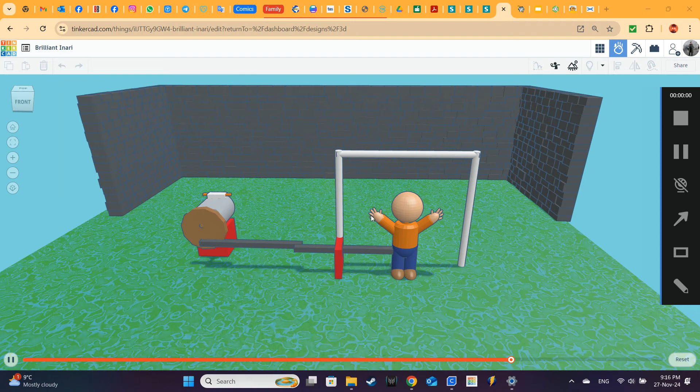In this case, we will start combining the three connectors that we learned during the previous lesson: the axle connector, the pivot connector, and the slider connector.

So for this first video, we will create a goalkeeper machine. Basically it works with a crank mechanism, and when I try to throw a ball, my robot will try to stop it before it enters the football area.

Before we start, let's analyze this machine, this mechanism. We have an electrical motor. If you attend my lessons, you're probably familiar with this kind of DC motor that you may find if you open a mechanical toy using a screwdriver. We have here this axle connector that is a motor — it has torque and speed.

We have a second axle connector that connects the crank to the connecting rod. This is not a motor, it's just an articulation. The next one is also an axle connector that also works as an articulation — it's not a motor. And to give stability to our project, we have a slider connector here.

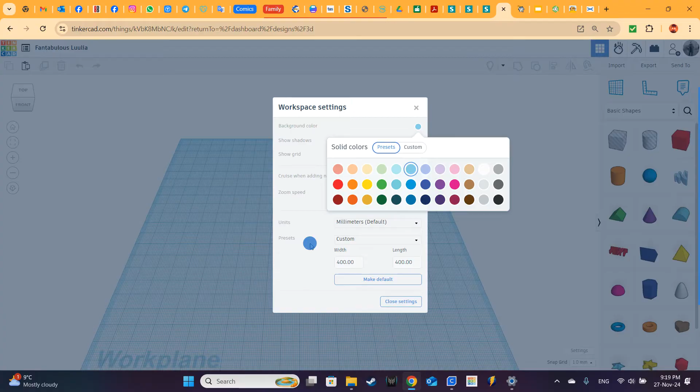Here in background color, I will change the color of the background. I'll use some blue sky. Close settings. You can choose the color of your preference here for the background.

The ruler is always good to bring — a ruler always makes your work easier.

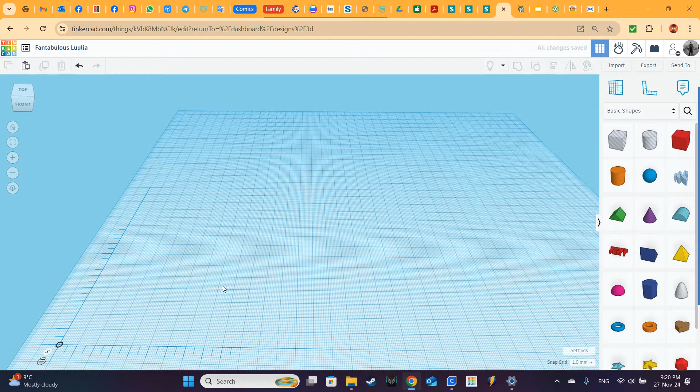Now, from basic shapes, I am bringing a box. Just a box here. Nothing special about this box.

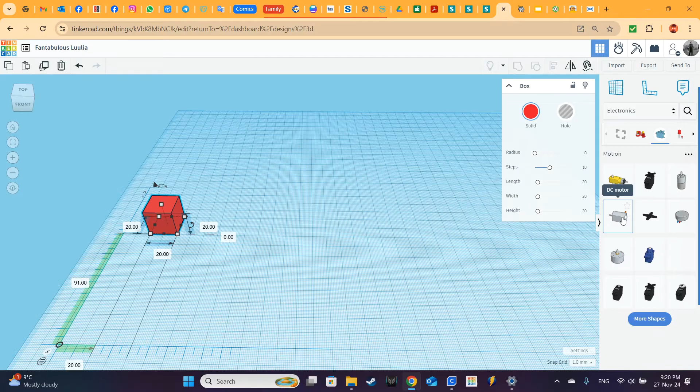Now, from the library, shapes library, I'm going to electronics. The idea is for you to start getting familiar with the real world components that engineers and designers use for their projects. We go to electronics motion, and here we choose the DC motor. This is the kind of motor you find in your mechanical toys.

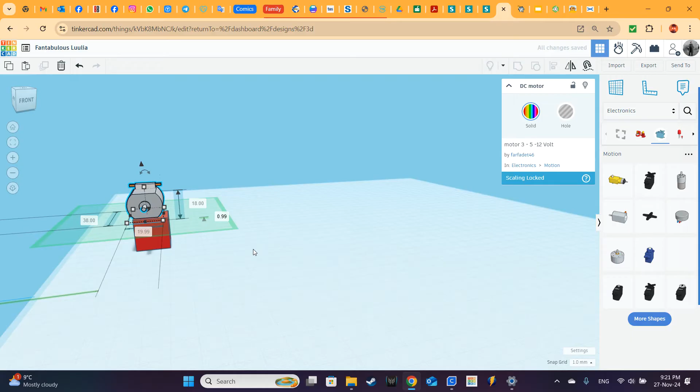I will place it here over the box. I'll rotate it 90 degrees. Good, 90 degrees also here. So here and here. Okay, so we have our motor over the box.

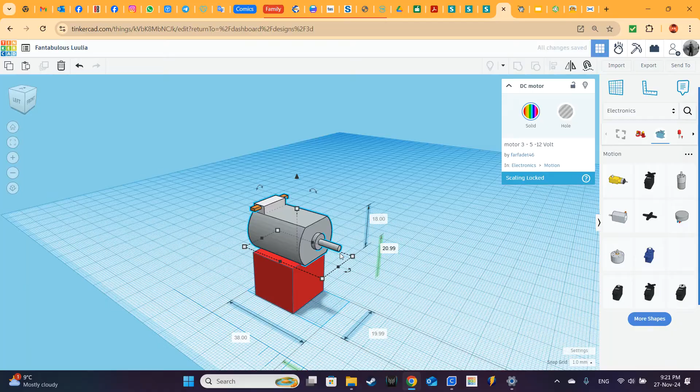Remember that in the real motor, this part is the spinning part, this axle. And these two pins are where you connect the electricity so it can transform electrical energy into mechanical energy.

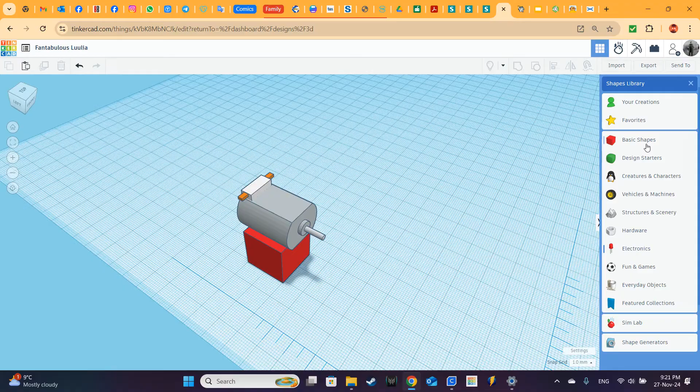Now I am bringing a cylinder from basic shapes. I bring a cylinder and I will place it here.

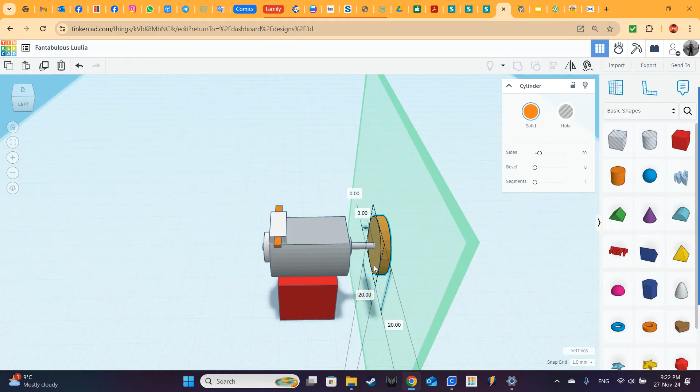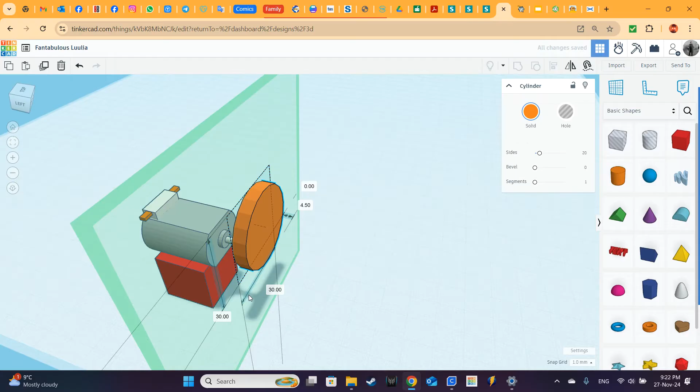As you can see, I place the cylinder perpendicular to the axle and parallel to the front side of the motor. I will change the size of this wheel — I think it should be shorter, yes. I will reduce the size a bit.

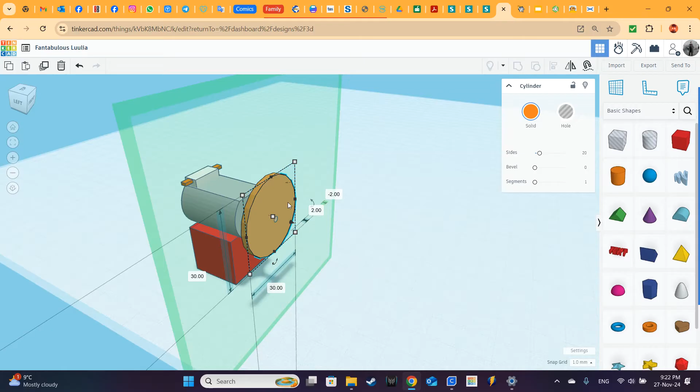Now let's try to place the center of the cylinder aligned to the center of the axle. So I go to front view, and if you remember from our previous lesson, we can change from perspective to orthographic flat view.

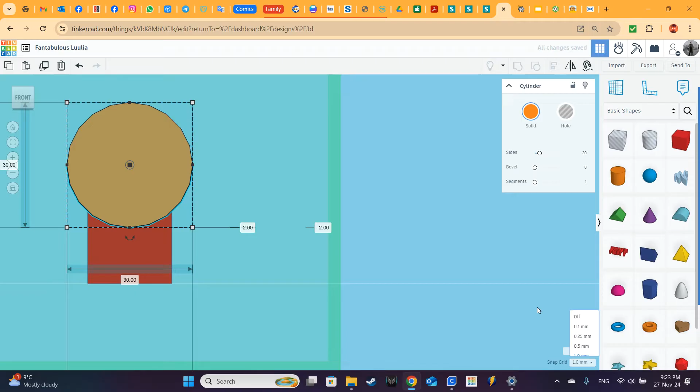Let's move it. Good. Even let's align here a bit more. Perfect. Yes, that will do. Okay, 1 millimeter. Very good.

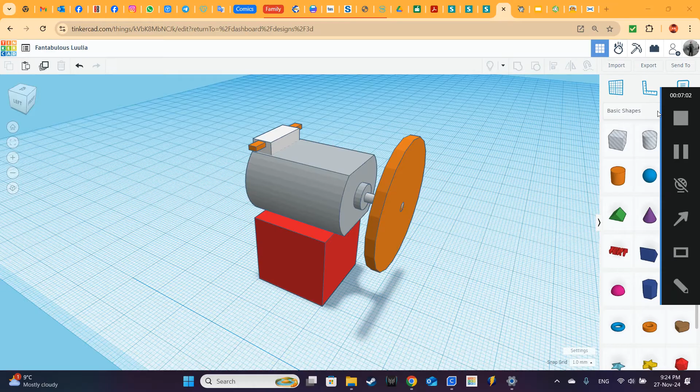Now that we have this first part, the motor, we are going to the SimLab — or you can also modify something here first. Good, much better.

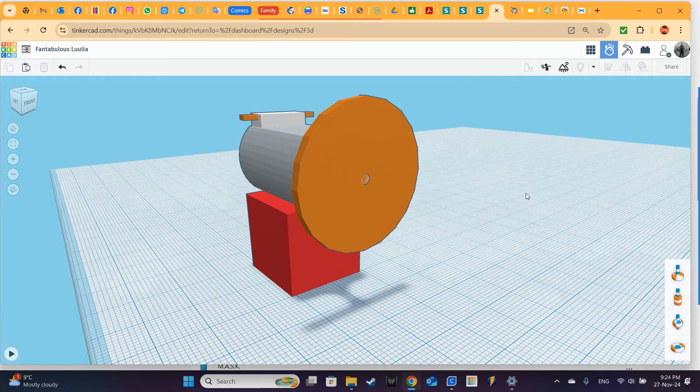So you can find here in the SimLab group of shapes the connectors, or you can go directly to the SimLab to start doing tests. So I go to the SimLab. Our first connector is a motor, so it will be an axle connector.

I bring the axle connector here and I place it here in the middle. Okay, good, that will do.

First, this box is static. It must be static. Here it appears as dynamic, so I am making it static. Static. The box is static.

Now the motor needs to stay in place. It's dynamic, so I will change it to static. Good.

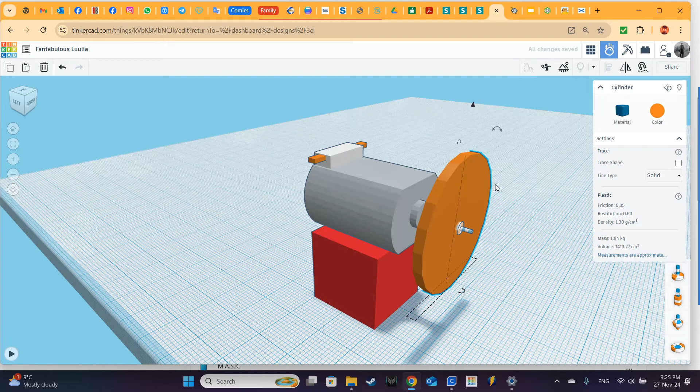This disc, I need to be dynamic. Is it dynamic? Great. I will change the color just in case, so it's clear what I will do next.

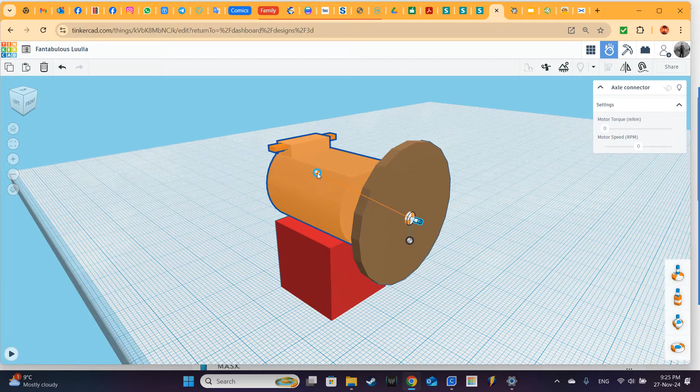I click the connector. Now let's choose the base part. Remember, the base part is the one that will be marked with orange color. In this case, the base part will be the motor, the base component.

Now I will choose the rotational part, this disc. So I grab the gray disc and I select the blue part, the blue component. This is a motor, so motor torque I will increase a bit, 65 could be, and motor speed.

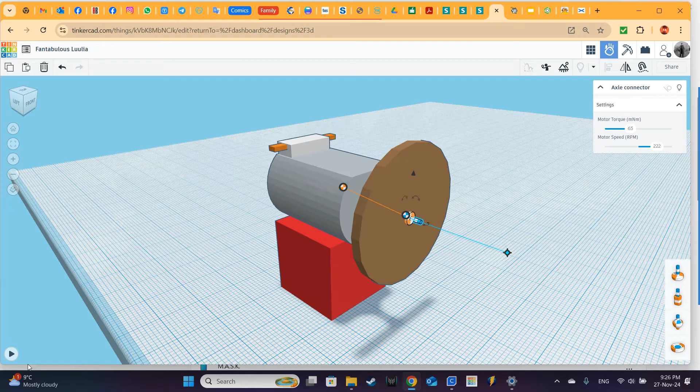Let's add some motor speed. Which one? The one that works best for you. You can do experiments until you find the perfect combination of torque and speed. Let's see if it works. Good, it's spinning.

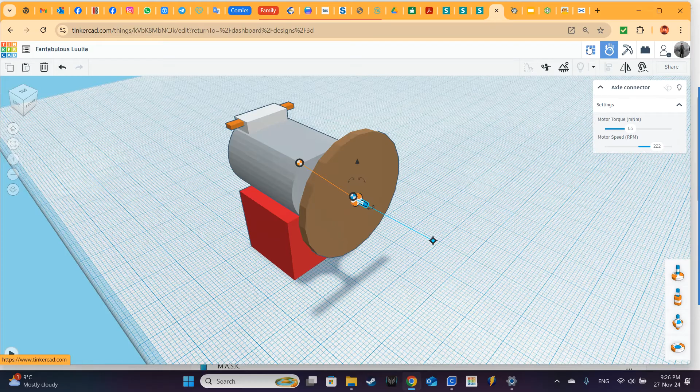So, first part ready: blue, orange. I return to the design environment.

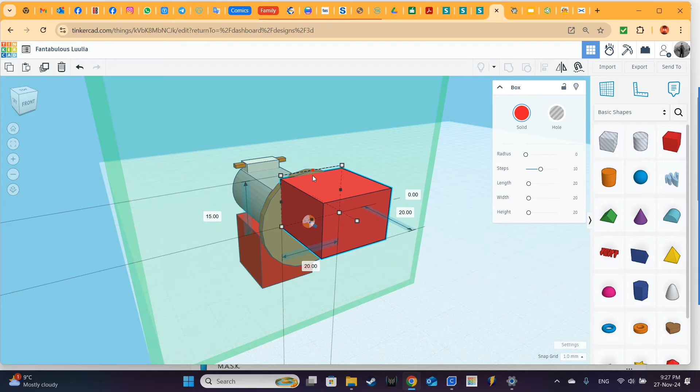From basic shapes, I will bring a box and place it here over the cylinder. Now I will build the connecting rod of this crank mechanism. I modify the dimensions of the box.

The idea is to create here a long rod. This will work, yes.

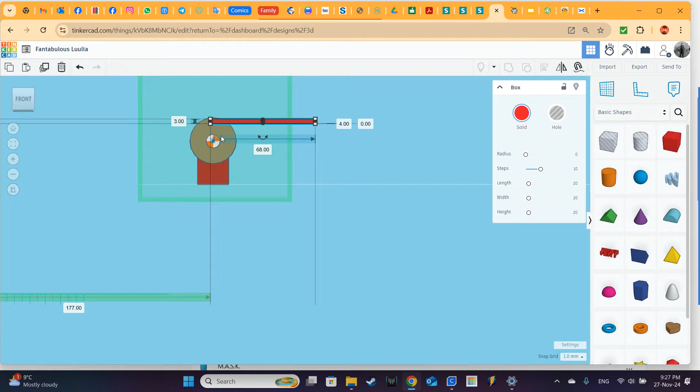And it must be located here in one of the sides of the cylinder. Here, okay. So I will move it here.

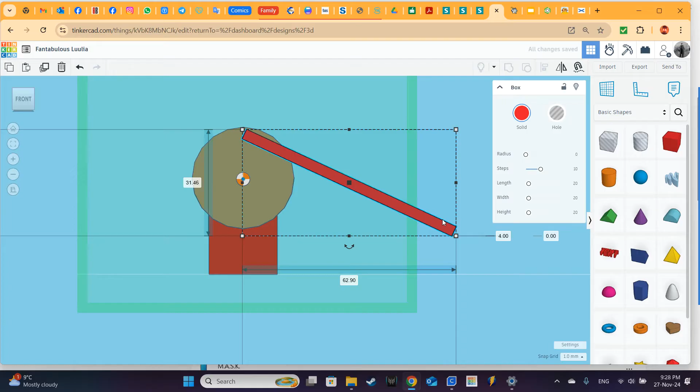Let's place it here, and let's modify the angle with this arrow. Let's modify the angle, like 25 degrees could be. Maybe too much. Okay, experiment.

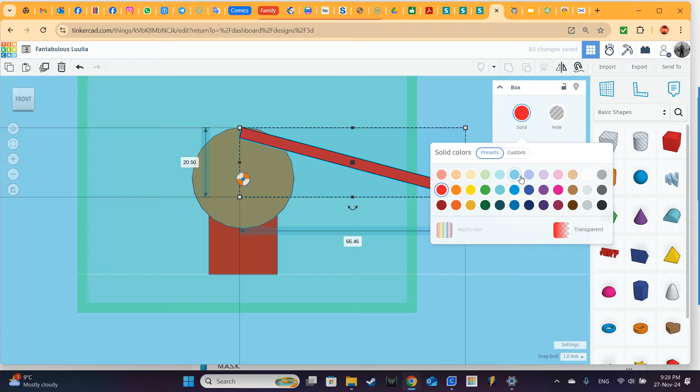You can do experiments until you find the perfect combination. Okay, this will do. And I will change the color so we can recognize the different parts. Okay, good.

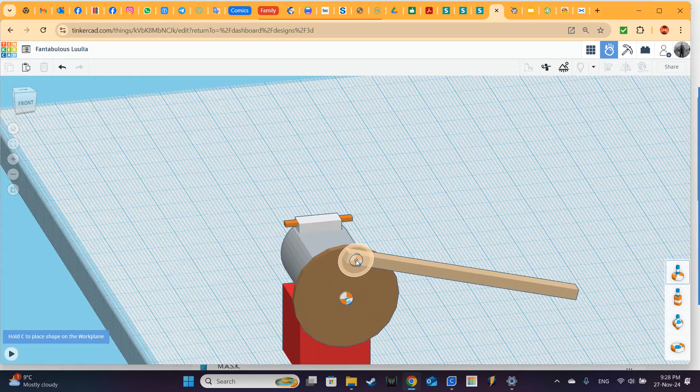So we have here the connecting rod. I am placing, going to Sim Lab, and at this point I will place another axle connector, axle connector number 2. The base component, okay, this will be the mobile component, the connecting rod in blue, and the orange component.

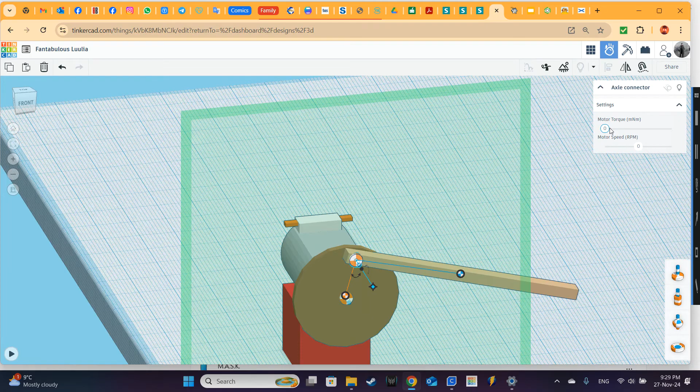So the base component, the one that is the referent to the movement of the blue part, will be the disk. Good. This one is not a motor, it's not a motor, so motor torque and motor speed must be 0. Their only mission here is to be articulations.

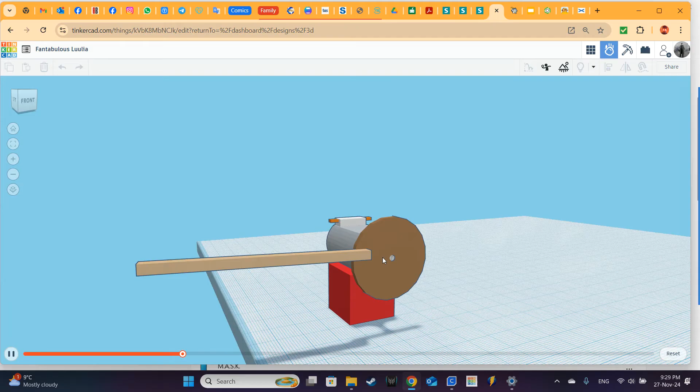Okay, so let's test. Let's check if this works. Play. Ah, it's working. As you can see, it moves like crazy.

But don't worry, we will solve it. Okay, perfect. Reset. We return to the 3D design environment.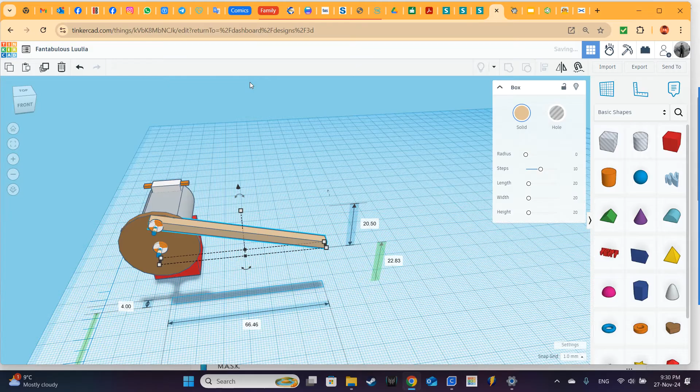I will duplicate this rod. Command D, or Control D, or this icon, your choice.

Let's try to make it parallel to the surface, to the work plane. So, top view. When you design, play with the views. I think this will do.

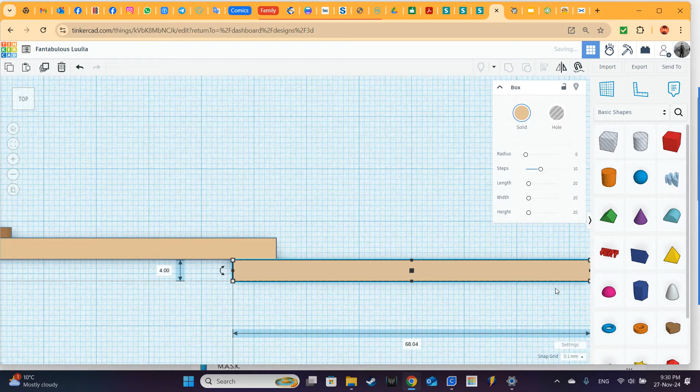Okay, good. Front view. Okay, I am placing this down. Okay, so...

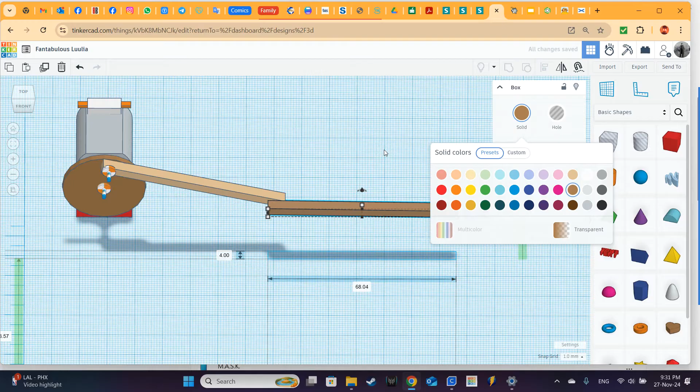Now for this one, before adding the connector, I will go to the library, creatures and characters, and I am bringing a person. It will be our goalkeeper. So I am bringing it here.

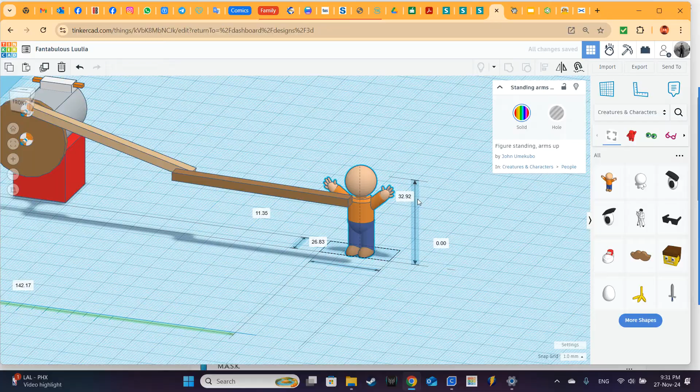Maybe it needs to be bigger, so I press Shift, I click Shift, and I increase the size. Okay, good. This will be our goalkeeper.

I will select both shapes: this connector for the slider, this rod for the slider, and the goalkeeper, and I will group them. Group, Control G, group.

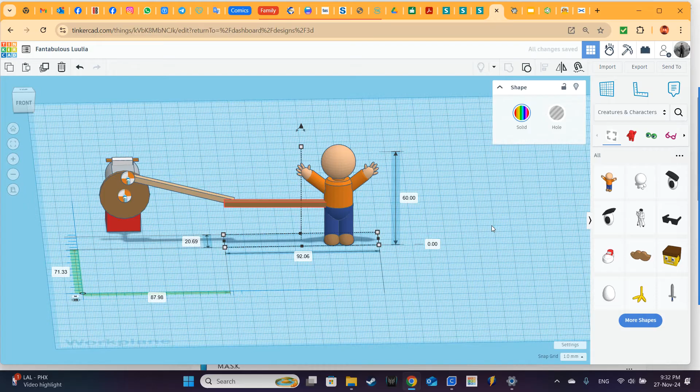So as you can see, this is one single shape. And now, after grouping them, I will bring another connector.

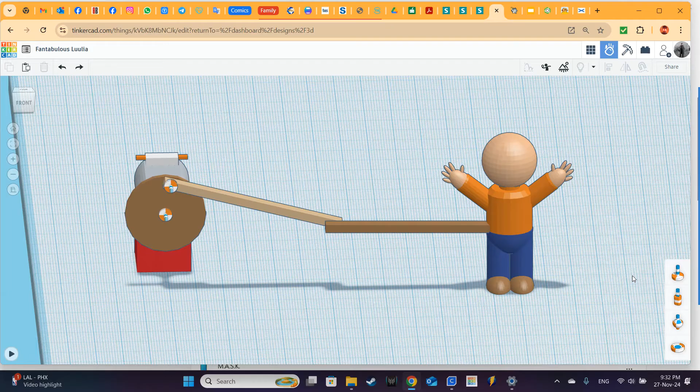So I go to Sim Lab, and here at this point, I bring another connector here. So the base component in orange will be the connecting rod, this one, and the blue component will be the goalkeeper with the rod.

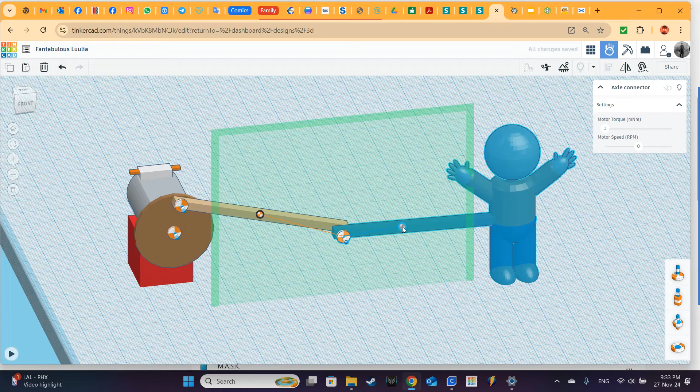Okay, so far we have here three connectors. Wait, I think I need to make this a bit longer. Yes, sometimes it happens. Sometimes you have to return and modify something.

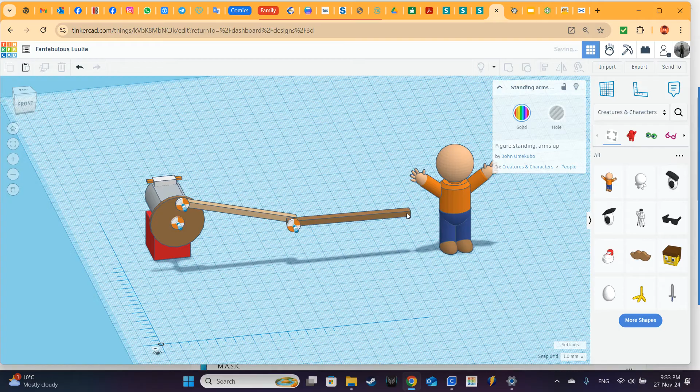Good, it will work now. Now I group. Yes, sometimes you have to return and correct some mistakes before they get worse and worse.

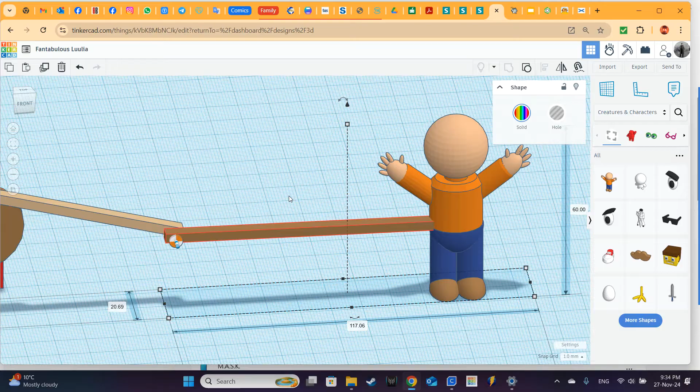Let's wait until this finishes rendering. Now, I again attach the parts. This is the orange component, this is the blue component.

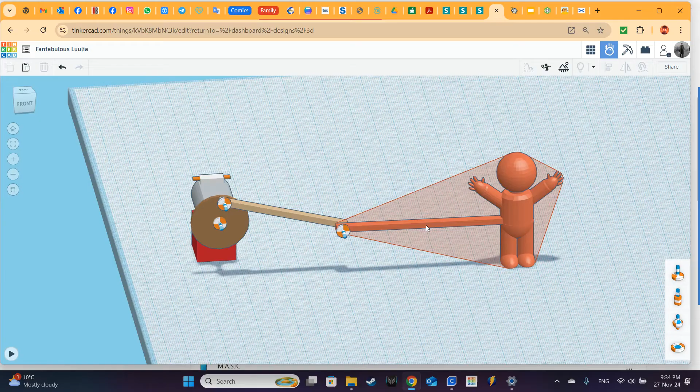Much better. Let's test. So we go to the design environment, to the SimLab environment. Let's wait until it finishes rendering. Now let's test. As you can see, it kind of works.

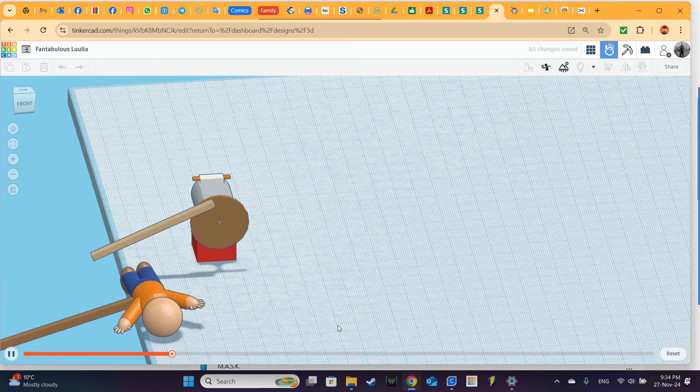Let's reduce. Okay. So as you can see, it kind of works, but it has a problem, and it's that it behaves like crazy, look. So it's not a stable mechanism, and it will get destroyed if you don't add some stability to this mechanism. How to solve the problem?

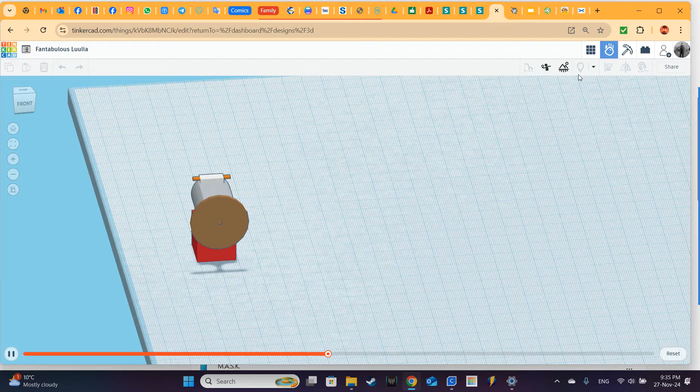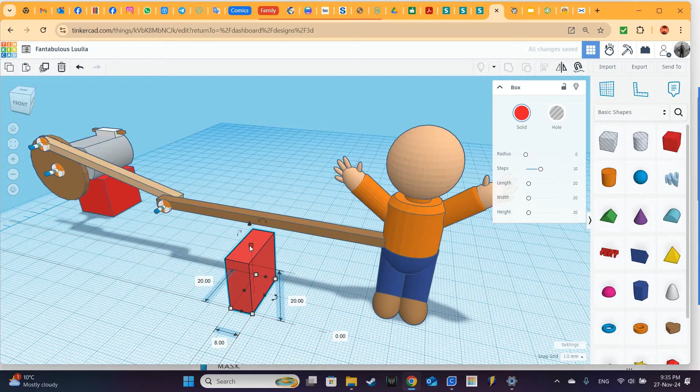Here is when the slider connector will help us. So I go again to basic shapes. I bring a box. So from this box, I will create the slider mechanism.

So this is a normal box that I am placing here. And over this box, I will bring a hole box. The idea of this hole box is to drill a hole that allows the connecting rod to pass. So this will be the slider.

So here, let's check that it's drilling the box. Let's check that it's more or less at the same level of the connecting rod, sorry, of the sliding rod. Okay, yes, it may work.

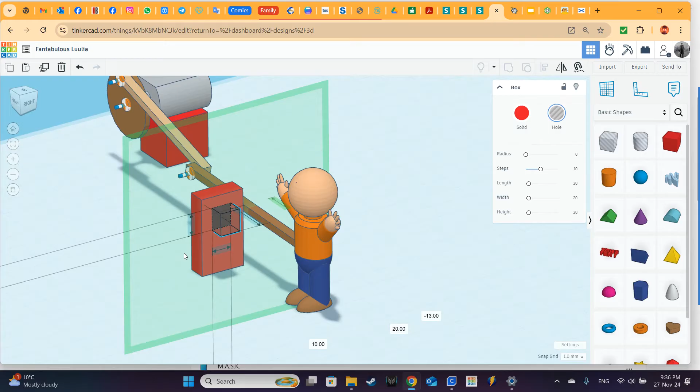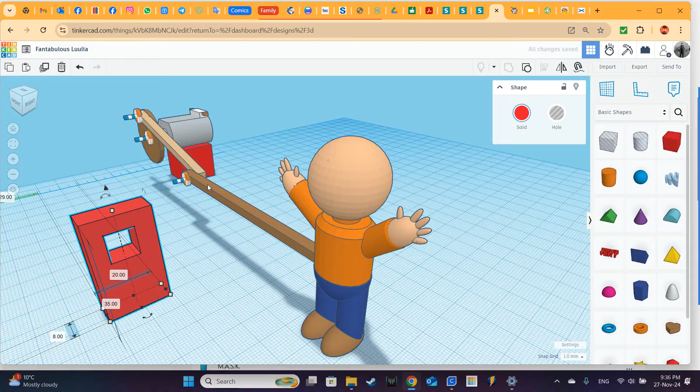Now I group, pressing Shift, I group the hole with the box. Group. So this shape here is independent from the others right now. I move it here. Check that the rod is passing through the hole.

Very good. I go to SimLab. Now in this case, this component, remember that is static. We need it to be, imagine that you are nailing this component, you are screwing this component to the ground. So I will make it static, make it static.

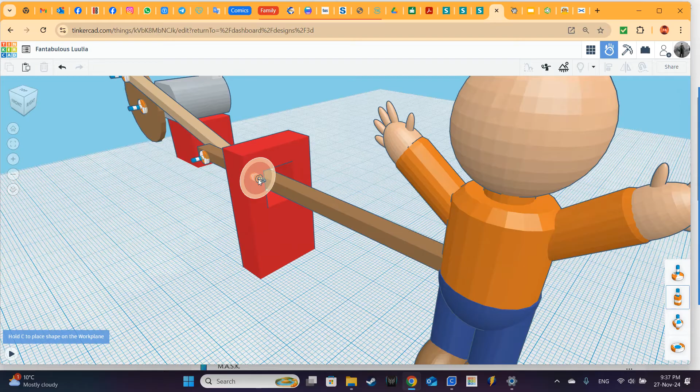Now it's static. Now from connectors, I bring the slider connector. I place it here. Good. Base component is this box with the hole. Mobile component is again our guy, our goalkeeper with the rod.

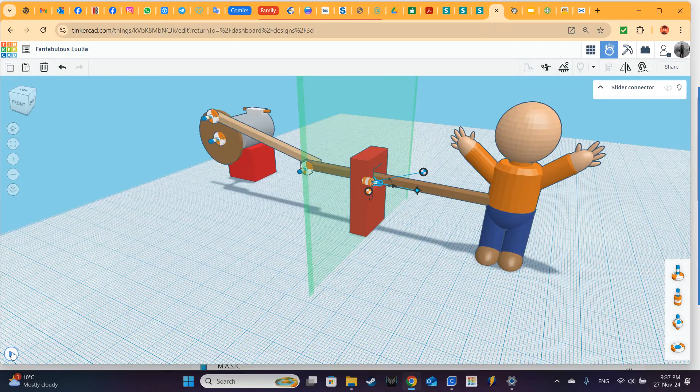So now let's test our machine. As you can see, it's more stable. As you can see, the goalkeeper is not trying to escape. As you can see, this machine is not trying to self-destroy. So, success.

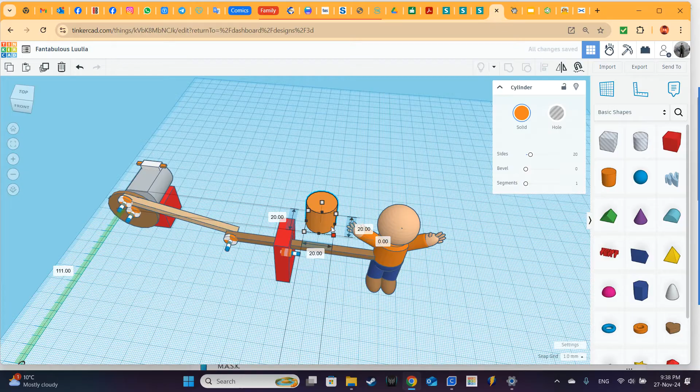So now let's start creating our football area. Reset here. So let's bring, let's create here the goal area. So let's place it here. Let's change the color, maybe gray. Yes.

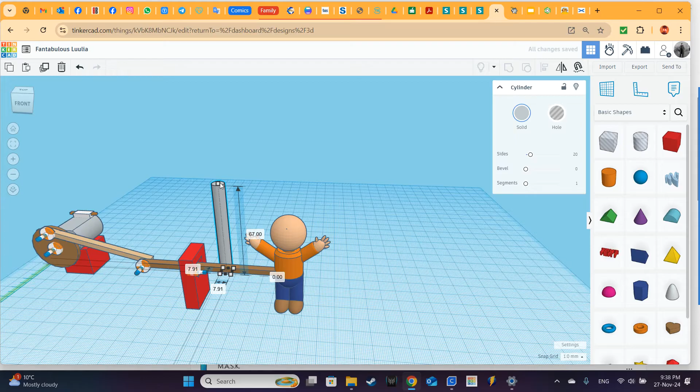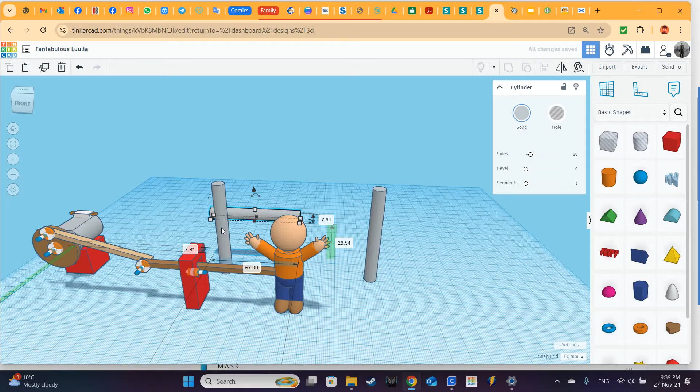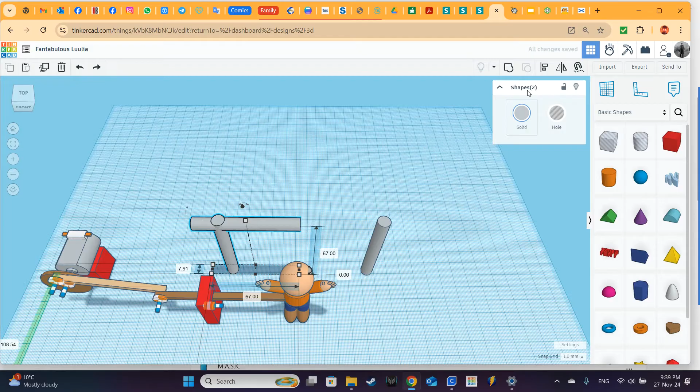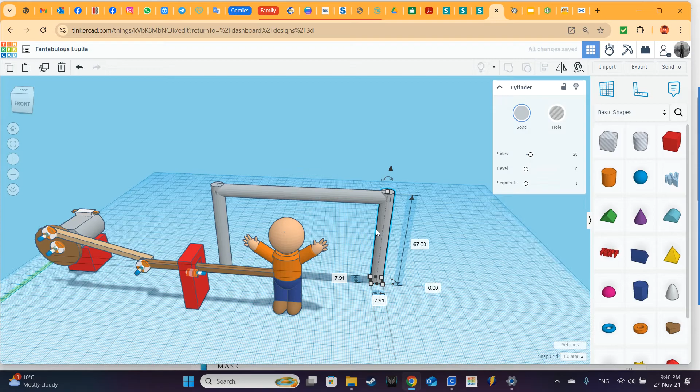Control D. Okay, here. Control D. Perfect. So let's bring it here. So here we have our goal area.

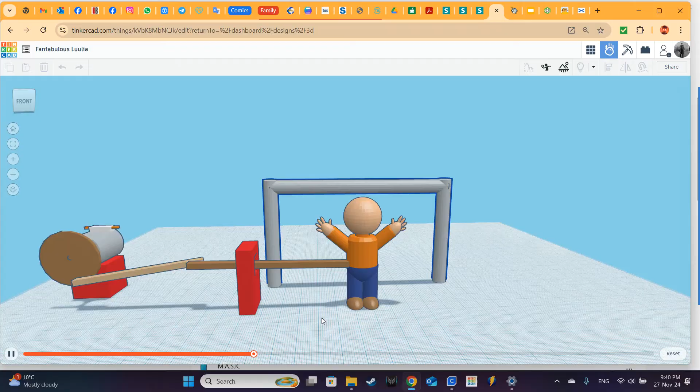Remember that this goal area must be static. Let's test. Okay, maybe a little bit shorter. Let's move it here a bit more. Okay, here's your choice. Yes.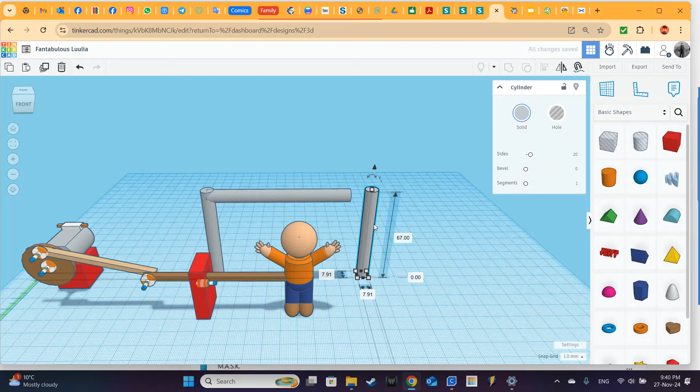Static. Now you want to test here shooting throwable objects. We'll choose the ball. Unless you want to play football with a pig or a lobster, your choice, or an anvil. So let's see if we can score a goal.

Okay, goal. Good. Perfect.

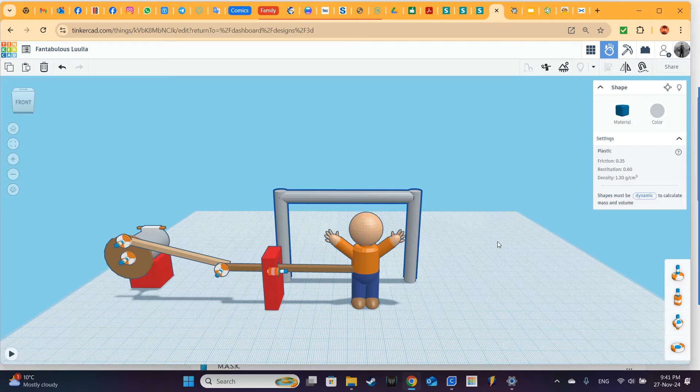Reset. Let's change the ground. Let's say here this ground. Remember here we can modify the scene settings. Let's make the ground material bouncy rubber, color green. I think this one is the most appropriate color.

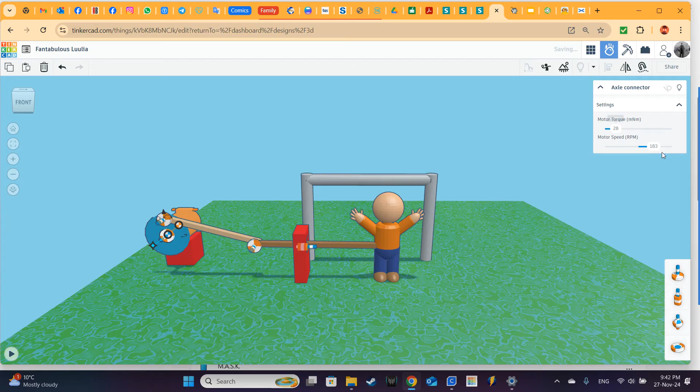So let's test. Ah, too much friction. So here you can start experimenting until you find the perfect combination.

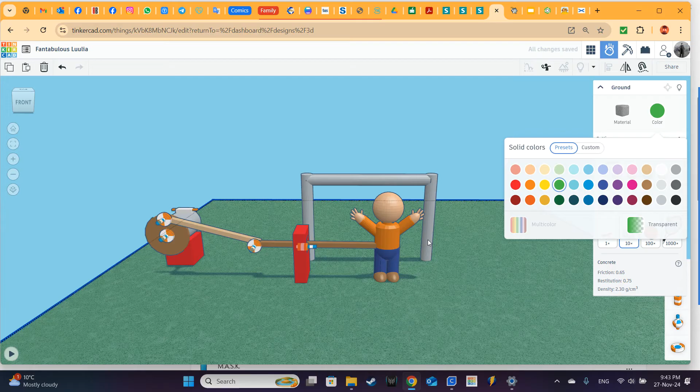Great, green. Ah, maybe too much friction. So let's keep it here in the grid. Color green. Super, so green color.

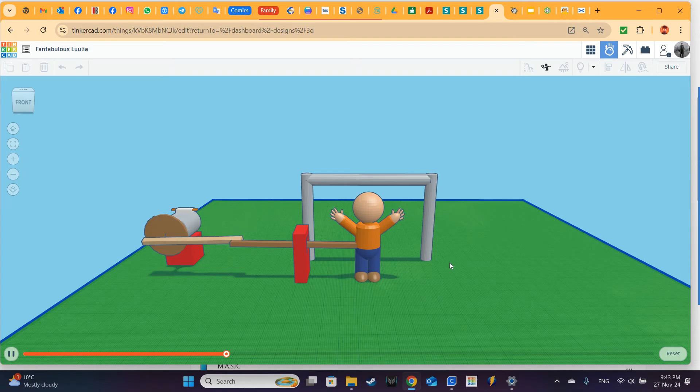If you want to keep track of how many balls you are using, of how many goals you can score, you can search here for a shape named wall. You can bring the wall here.

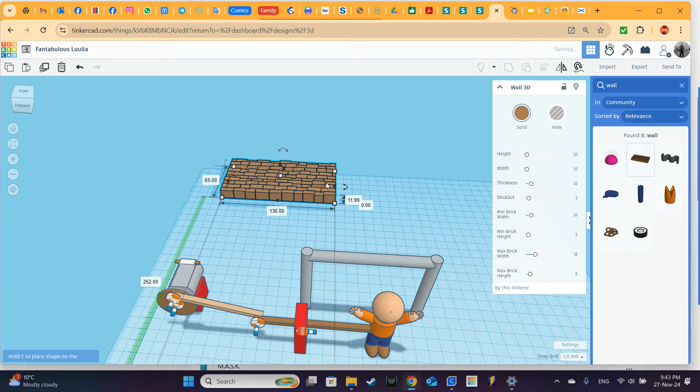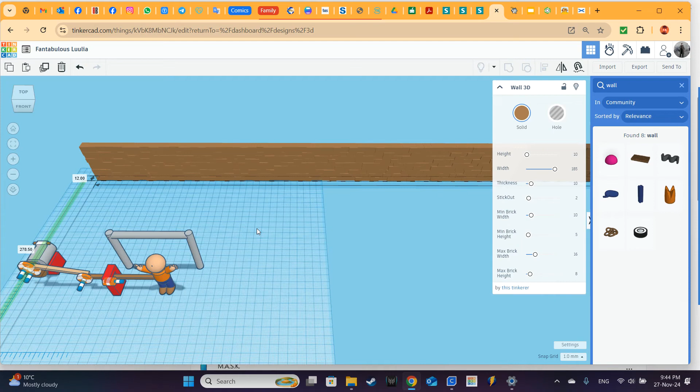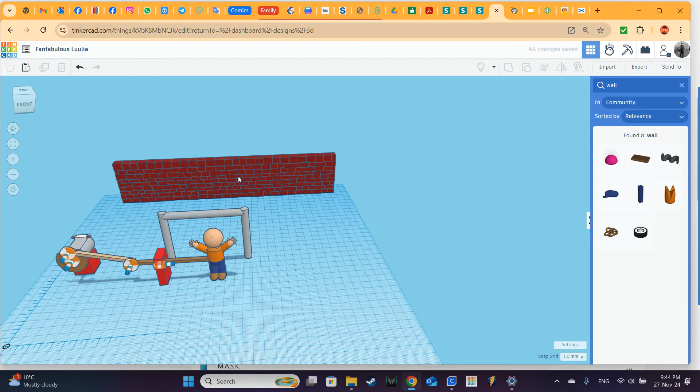Okay, good. Control, Control D. So we have here our wall.

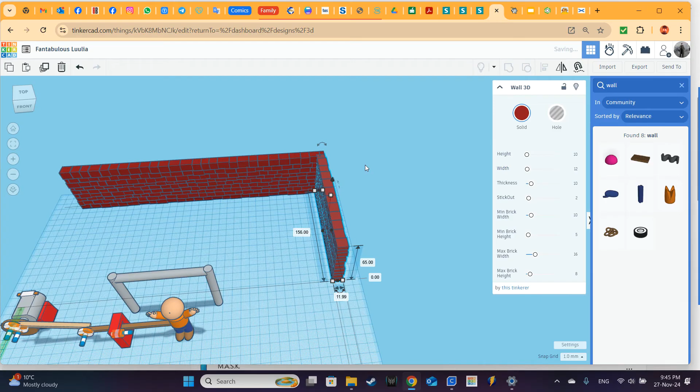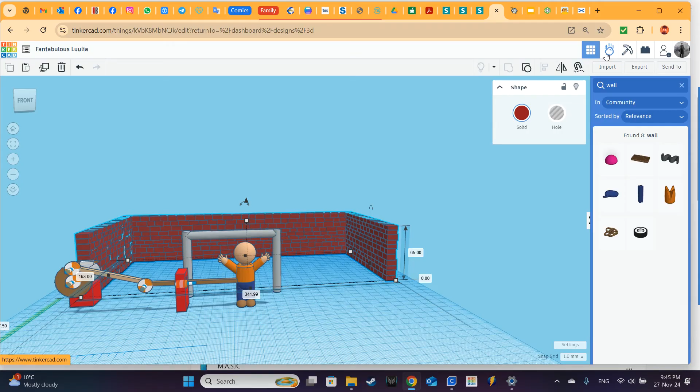So we can keep track of how many goals we scored. Control D. Group. SimLab. Let's make this static.